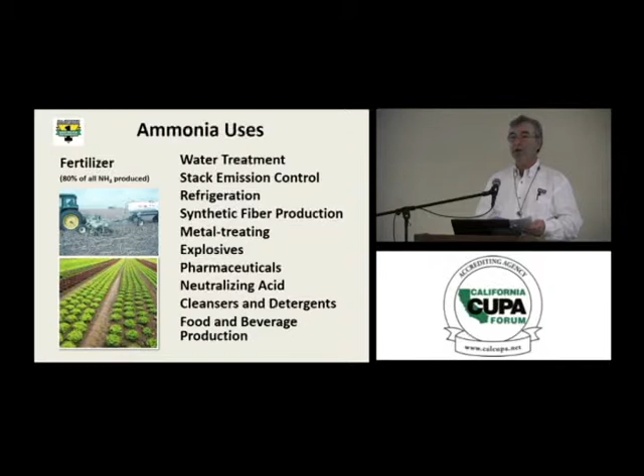The popularity of ammonia is going up. With the Montreal Protocols, Greenpeace actually called it the refrigerant of choice because it's one of the natural refrigerants. And this slide comes from a good friend of mine that just passed away this last year, Anders Lindborg. And I have a few of his slides in here because they're good, and it's a memory for me using his materials, because he was an international soul. He was the prince of ammonia internationally, all over the world. And he promoted the idea of ammonia as a good chemical that could replace chemicals that are not as good. And ammonia is very efficient, it doesn't take as much power to use ammonia as a refrigerant, and plus when it's released to the atmosphere, it breaks into nitrogen and hydrogen. It doesn't have the carbon, and of course that's a big challenge.

So why is it great that ammonia stinks? Right? It stinks. Since you were a kid, you remember your mom mopping the floors with the ammonia? You've been around it. If you ever played football and you got the smelling salts, you've been around it. But why is it good that it stinks? It's a warning sign.

Exactly, it's a warning sign. Most big problems start off small, and most problems can be smelled, especially by the nose that has not been burned out from standing in the odor of ammonia for any time. After you get into it for 5, 10, 15, 20 minutes, the olfactory fatigue comes in. You don't even know it's there as much. You get used to it.

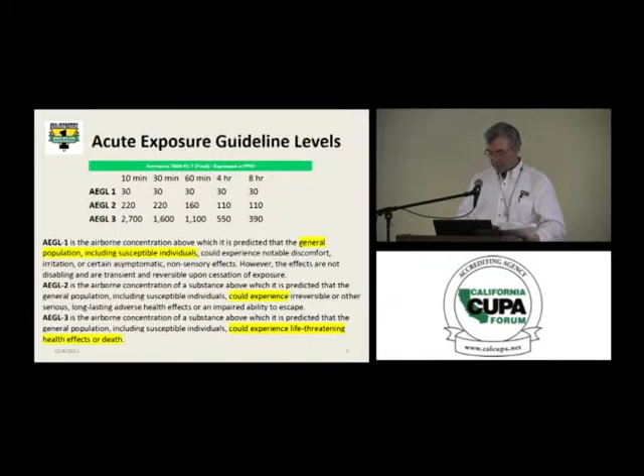We have done the evaluations. I should say the Chemical Safety Board did the evaluations, and they came up with a 5-year review of incidents that happen in refrigeration, because they get a lot of them. It's a high volume rate of calls, but the injury rates and the death rates are actually relatively low. Once they studied them as a group, they found that valves and piping are your number one concerns. And most all valve and piping issues start off with minor releases, minor problems.

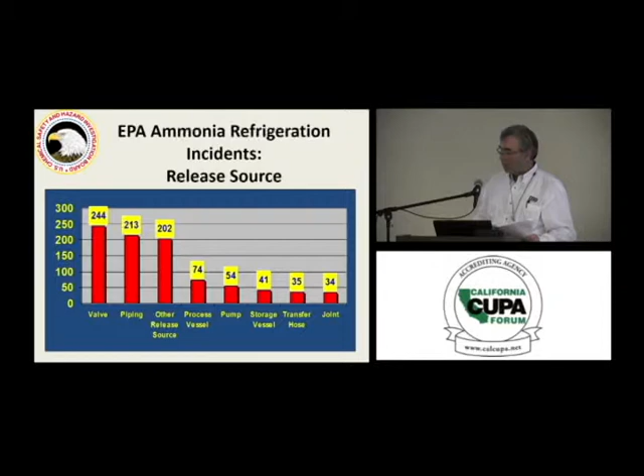And then the employee is caught up in a situation where they may be addressing it the wrong way. This is the operator working on the system, and all of a sudden, there's a crack in a line, they're trying to tighten or loosen or manipulate the system, it opens up right in front of them, and they're hit straight on with an aerosol cloud with no protective equipment on, because they're just simply doing a minor adjustment or they're checking something out.

And so when they can't see and they can't breathe because they've been hit with this aerosol, they go down, and based on their training and background, they may not ever escape any further than that. That's where most of the deaths have occurred with regards to the workers related to ammonia.

The only public death we had was a heart-related problem during an actual escape, and it was the stresses of the emergency event more than the ammonia that caused that. We have 3 zones of concern. It starts with the IDLH in the hot zone, right? 300 parts per million in the hot zone, that's where the risk factor is high. And generally in a system where you have it contained, that's going to be in the room.

Clear the room. Pretty easy to do if you're not the victim right in front of it. Pretty easy to get out of the way of an ammonia release. You go out the door, you close the doors, the release is contained to the room. Now you go to the system, and the system will then control the problem. And then you ventilate the gases. When you ventilate the gases, you have an isolation zone.

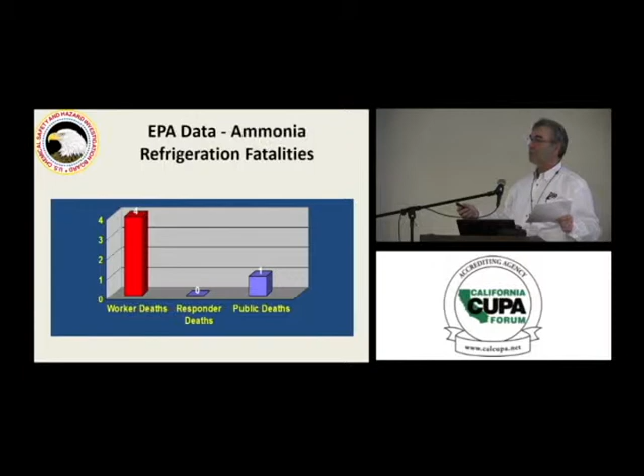So when we learn these facts and we apply it to our plan, and we have the muscle memory to put this in effect, we define our zones, we know what life safety really means. And we use that in our protocols.

Change. So just to give you a little comparison, the death rate looking from 95 to 2004, this was with the Chemical Safety Board, they came up with a total of 22 deaths over all industrial users of ammonia, 11 in refrigeration. So there was a 2.2 per year annual rate in general and 1.1 for ammonia.

Now if you look at carbon monoxide, this was a longer period of time, but we took the annual average, and it was 88 per year. If you take nitrogen, it was 7.3 a year. So you can see that some of the gases that you don't smell, that you don't get warning on, that all of a sudden you fade off into sleep, or you fade off in an inability to breathe, like nitrogen poisoning will do, death comes a little differently. Whereas ammonia is in your face.

I portray it as a hard-working sailor that does a great job, from everything that I described earlier, being a fertilizer to a refrigerant and all the other things in between. But when you let it loose, that sailor is looking to get a drink. What's the drink? He loves water, and he's going after it, and he's going to be fighting mad for it, and he's going to be in your face, and he's going to tell you all about it.

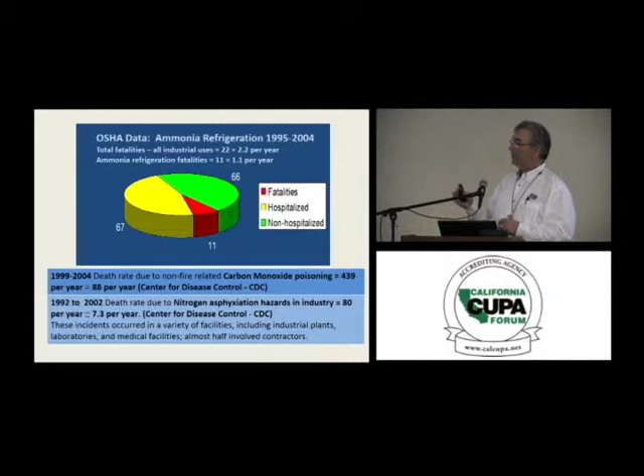And what do you do about it? You close the door, and you send him to the brig. You put him off in his room, and you cool him down. You just cool him down, and he gets easier to manage. The more pressure you take off of him, he settles back down to a nice guy. And when he's a nice guy, you can isolate him and control him. And basically that's the story about ammonia in a general sense, but I'm going to show you the specifics in a minute about how to accomplish that, how to get that to that next phase.

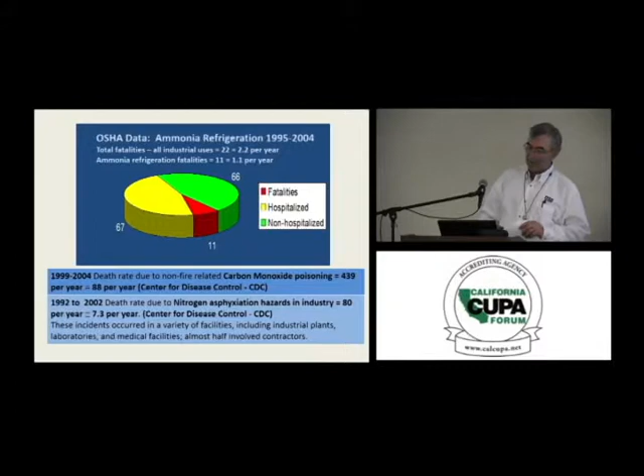Change. Also, there's a high level of injuries that follow along with the same information that I gave you earlier about why we have deaths. There are so many situations where the workers are caught right next to the release, and we haven't got it into culture yet to wear that PPE during the time they're doing maintenance, service, odor investigation, the things where we know these problems occur.

Any old salts from the fire world here would identify with this. I started in 1970 with the city of Davis. The fire chief at the time smoked a cigar. He stood in the doorway and he says, as long as I can stay in the doorway, you don't need that breathing apparatus. Just go ahead and hug the nozzle, and if you got to puke, that's part of life. That's what it's like being a firefighter.

Well, he died with heart disease at about 52, and the United States had the worst record on deaths and losses than any other industrialized country in the world, because we weren't paying attention to the facts. We were being too macho. We had a culture of leather lungs, right? That was supposedly the toughness of being in the profession.

But we changed that with America Burning, a federal act. The federal act came along and they said it's unacceptable to have these levels of losses, and so we had training, we have PPE, we have fire prevention, we have mitigation, sprinklers and smoke detectors. The world came alive with answers. And now we cut the death rate and the injury rate in half, and now we're back where we belong. We're leading the way in reducing life loss and injury, because we engaged the mitigations, we engaged the training and the common sense, and we changed our culture.

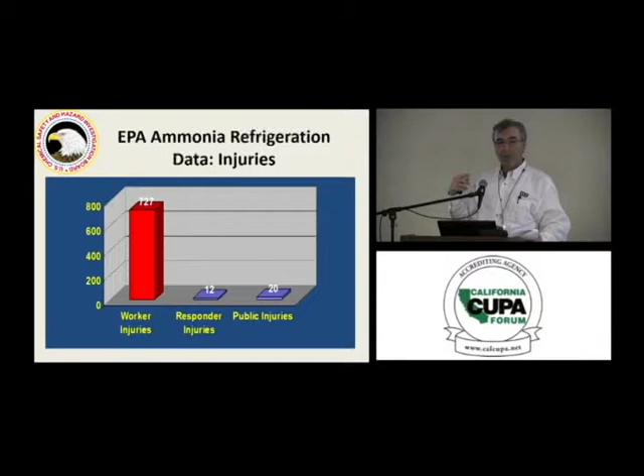Today, if you see a firefighter, even on a dumpster fire or a car fire or an outside fire, without a breathing apparatus on, the shame is going on that person and the discipline as well, because it's not acceptable anymore. That's what we need to get into the industry. All of us need to get behind this and move it and get that culture changed. And then those rates are going to come down significantly.

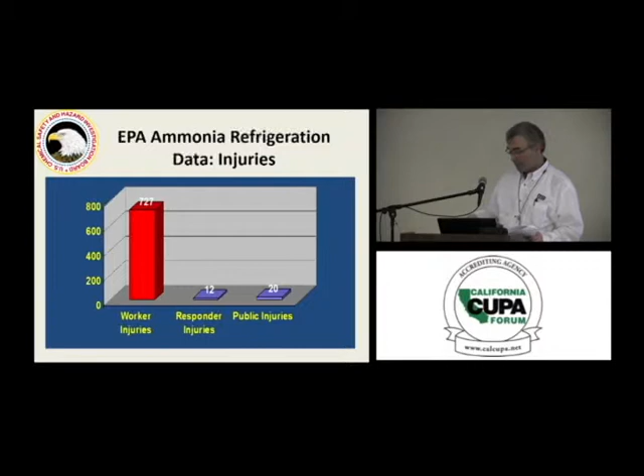Change. It's a cycle of safety. And the better we do this, the better we get at it. The bottom line is prevent them all or stop them small. That's what ASTI was born on with regards to the logic. Prevent them first and foremost. Mitigate them. Listen to the engineers. Work on the answers. Stop them when they're small, even from your standpoint of your response protocols, because that's your best chance. And it happens in the first 30 minutes. Take this golden time and maximize your use.

React quickly, but react smartly and engage. And it comes with engaging the PMP, as you can see over here in the process as we go around. Make sure that you have the right personal protective equipment that goes with an SOP for using it, that we have the layout of how we're going to approach it, and then use your response plan, the one plan logic, to engage and stop the problem when it's small. The better you do this, the stronger the circle of safety is, the less that one's going to get away in that first 30 minutes. You'll stop them small, or they won't even happen at all.

Not a lot of glory in this, like firefighting. The suppression guys, they always used to tell the prevention guys, name one good fire that you put out. Well, of course, it never happened. But they could name a bunch of them that they responded to. Well, that's turning around now with regards to our process. We don't need to go there. And that's where PSM came from, right? If it wasn't for the fact that ammonia has some dangers or risks associated, would PSM even be here? If we were really doing refrigeration and all the processes with water, would we need PSM?

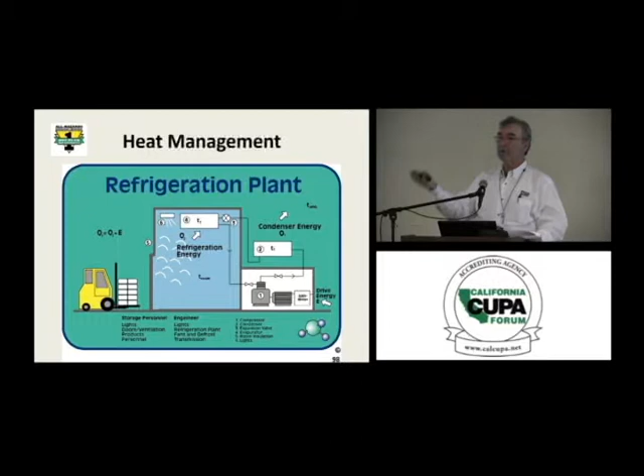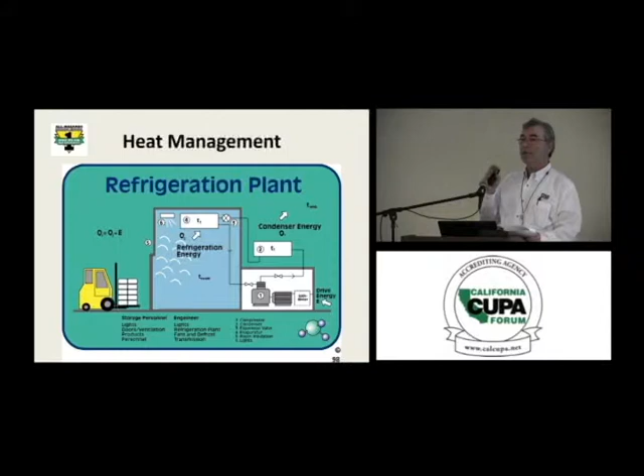So that high pressure vapor that's ammonia, what's it turn into when it cools down? Liquid, right? Now liquid falls back into the receiver and then the cycle starts over again. So it's the switch with evaporation to absorb the heat and the condensation that lets the heat go to the atmosphere. So the heat that came in is the heat that goes out. So in that process, how do we manage it?

Well, just to give you a quick diagram, the process has got a low side, and the low side looks kind of like this in the cold rooms where you've got these evaporators, see the fans up there, and that's where the ammonia is making the transition, and it's absorbing the heat out of the room. And then it goes to the high side, to the engine room. And these are the compressors where it's taking that gas back in and it's going to make it a high pressure gas.

And then it's going to go from the compressors up to the condenser on the roof. And this is where you see the vapor coming out of the top of these, because it's cooling that down. It comes in as a high pressure gas, comes out as a liquid. And then it drops into the receiver. And in the receiver, it's stored there, and eventually with processing, they take the vapor off and they cool it down, and it gets sent back out to the evaporator.

There's a potential stopping point we call the king valve, where the king valve is the liquid shut-off valve from the receiver out to the rest of the system. You shut the king valve off and you stop the flow. Now, many times on the simple version of doing emergency control, it's thought, well, let's shut the king valve off. That solves all the problems. Well, Don jumps up and down as an engineer himself when he hears anybody say that, because it doesn't necessarily stop all the problems. It's just one part of the puzzle.

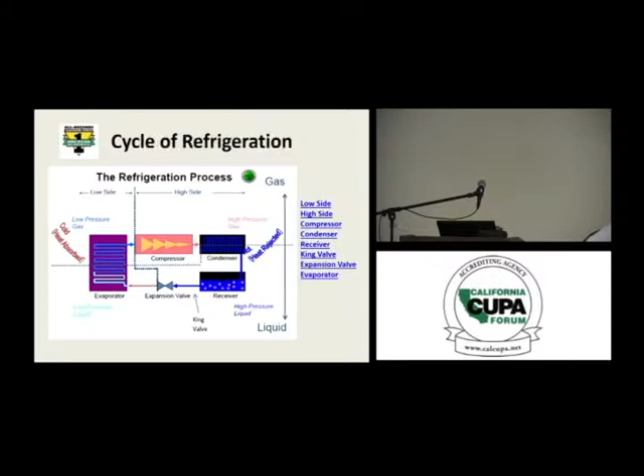Let's say we can set the suction pressure to 0 and bring his temperature down to minus 28 degrees. What's old Sal Ammonia doing then? He's asleep. He's settled down. He's now a liquid, very stable. If I had this cup full of ammonia, and it was minus 28 degrees, would you be smelling it right now? No, it'd look like water.

What if I threw it out on the floor? You'd jump, wouldn't you? Because then it would evaporate, and all of a sudden it's not minus 28 anymore. Now it's absorbing all the heat when I threw it out there, and it flashes off, and it's a cloud, it's a vapor. It fills the room. But as I got it in the vessel, I put him in the brig, and I cooled him down, and I took his pressure off of him. Very manageable.

There's engineers that are telling me today that if we master this process in the emergency shutdown, where we take that vapor pressure down and get it to zero, Don was helping us with this the other day, in 10 minutes we can take a system that's out of control and bring it down into something that's settled down, because we can take that pressure off.

If we could shut off the heat flow that causes it to want to go to that process and just use the compressors only to bring the vapor pressure down, we can do that. That's the goal of operating ourselves in the first 30 minutes out of harm's way.

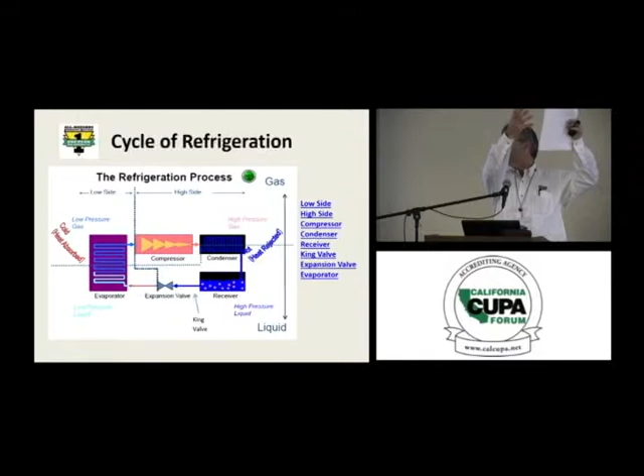And so just to show you on the last leg of the loop, there's an expansion valve that meters the liquid ammonia into the evaporator that's doing all the work that you saw earlier. All that warm air that comes off the product goes to the ceiling, the fans draw it across the coils, the ammonia absorbs the heat, flashes off, evaporates the vapor, goes to the compressor, and the temperature in the room

goes down. Now we stop that heat movement in an emergency action, and now we use the compressors just to settle old Sal ammonia down so he's not a problem. That's one of our strategies. That's one of our options. And that's why when we work with ammonia, we've got to learn how to use the system to get out of harm's way.

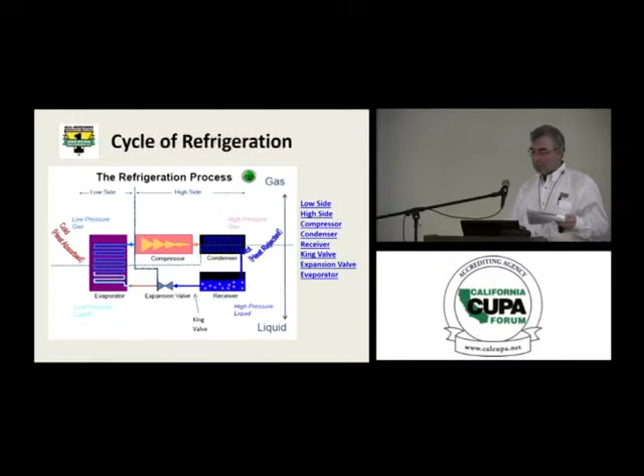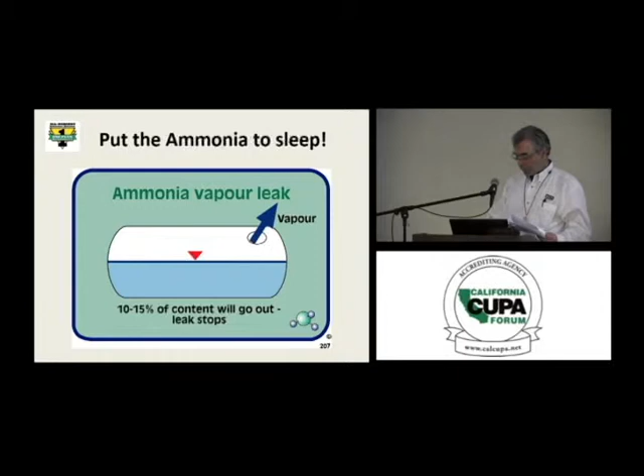So, as I said earlier, you got a leak. This is one of Anders' visuals. You got a vapor leak. If we can bring the pressure down and stop that vapor leak, the problem goes away. And a lot of that is by putting the ammonia to sleep. We also have manual pressure relief devices, diffusers that can do it, equalizers, methods of venting vapor when it gets exceedingly high, like relief valves.

And I'll tell you that the story on these diffusers, though, is nobody ever uses them. They walk away, there's an emergency shutdown button. Sometimes that gets shut off. And sometimes, is that the smartest thing to do? If you've got a situation where you don't have flammability issues and you got your emergency exhaust fans on, even though you have a leak, but you're staying ahead of it, venting the vapor, would you want to necessarily shut everything down? No, we want to take the pressure off.

We want to use the tools. We want the mechanic, the operator that knows what he's doing, to use his emergency action plan to use the system to bring the threat levels down. And we want to diagram that out so that he's ready to do it.

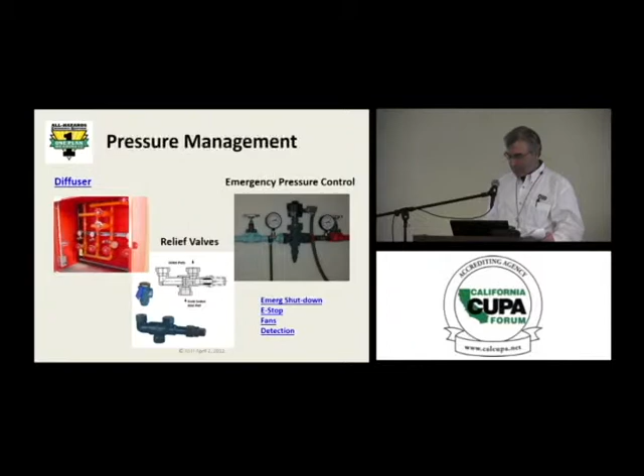The liquid leak, this is the worst. The aerosol that would blow off in a liquid leak and cause an aerosol dense gas cloud, high pressure. This is one of those times where if you have the compressor involved with pumping out a release immediately, off the thermal siphon or a part of the refrigeration system itself, that's when it might be the best thing to shut that particular compressor down.

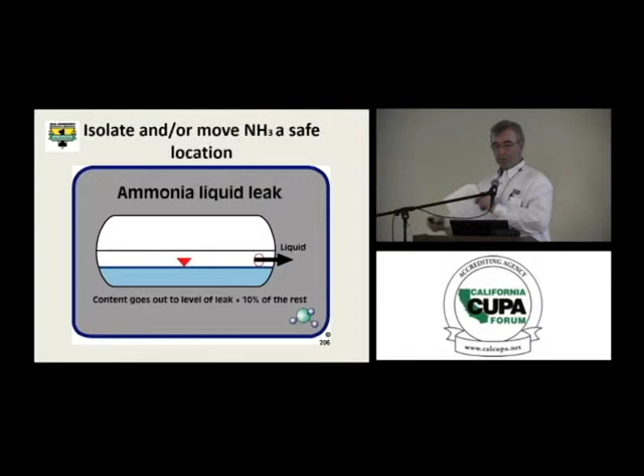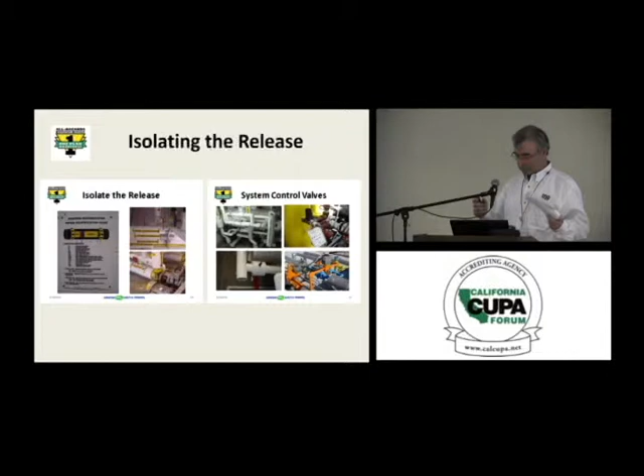But to bring the system down, you might use the other compressors to actually address it, or isolate, move the ammonia to a spot where it's safer, and then bring it down. And that's where we have the isolation valves that can be remotely controlled and automated so that you can move the ammonia around and reduce the impact of the problem.

When we get in situations where we have the releases, many times the releases start off rather small. They could have a gauge leak, for example, that would just start to put out an odor that gets stronger and stronger. And the idea is, can we get in here and actually isolate that leak, contain it to the area, and then fix it?

Well, unfortunately, many times with small releases like this, when the smell of ammonia hits the air, there's a fear factor that comes along with that first whiff of ammonia, and everybody shuts down. They walk away. And many times we can get an operator in on a small release and actually isolate it and fix it. And then I'll show you a little bit about what the releases look like as they materialize.

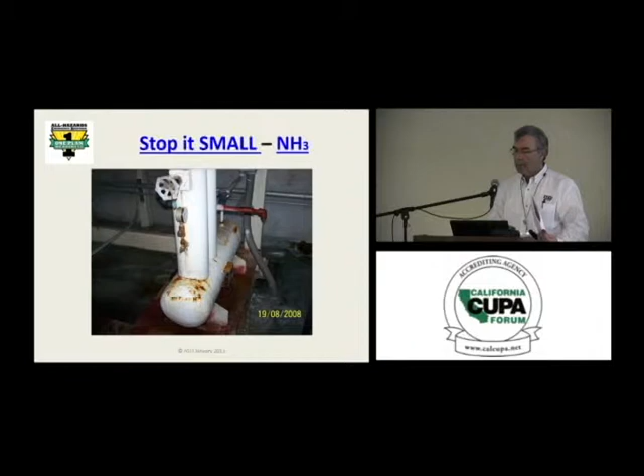Small release. The different phases of the release. You see, this is an aerosol release that we just let loose. And that immediate aerosol, this is a 1/4 inch line, about 80, 90 pounds, Don?

And that aerosol release that really first came out there is going to be a lot of droplets of ammonia. Now, when the droplets of ammonia evaporate into the atmosphere, what happens to the temperature in this area? As it evaporates and takes that heat that's in that area, it's going to get cold. Anybody have an idea how cold it can get in those aerosols? Minus 80. Minus 80 degrees.

You're caught into a big dense gas cloud like that, the freezing factor is significant. And of course, it's 30, 40,000 parts per million, so that's way above our potential to breathe or to survive. The only thing you can do, as just recently happened with an experienced operator: he was shutting a system down, he walked over, and it turned out that pressure had built up on the condenser on a smaller system, a portable system, blew the whole end of the condenser off with 1,000 pounds of pressure, a lot of pressure behind it.

When it blew, it just sent about 200 gallons of ammonia immediately flashed. And a dense gas cloud, he hit the ground, it knocked him over with a concussion of the explosion. He sees it coming, and with split logic, muscle memory from his training, he realized that he had two choices on his escape. Which way would they be? If it's coming over me this way and I'm on my back and I'm rolling over, which way am I going to go to get out of that release?

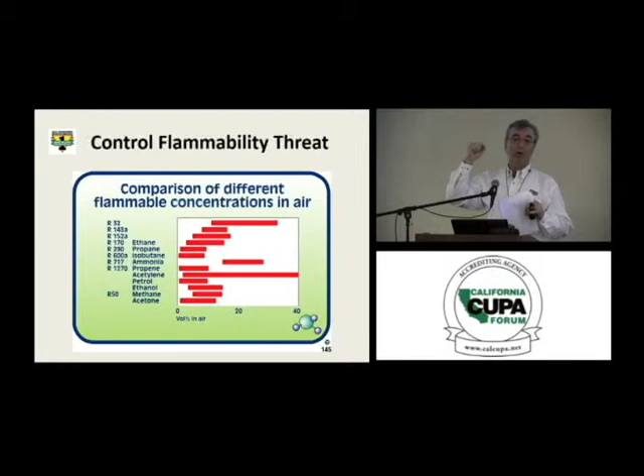And when it ignites, it's just like a flashover in a fire. It's like smoke when it burns. It's got that kind of flash potential. It'll knock you down, it'll flash over, and then it'll be done. It doesn't have the concussion power that propane does. Propane, the curve on that is real high. It hits hard and it's over. Ammonia burns for a little while.

I've been through 4 fires while I was a fire chief in Watsonville with ammonia. And one of the good stories about it is it vents, it goes in the thermal plume, it's never really been a problem. And if you got a good operator, they're going to move that ammonia out of harm's way and put it back in a receiver where it can be safely stowed and isolated from the rest of the release. That's why they got to be part of your team.

This one was a circuit breaker box, a circuit breaker that had been giving that company problems, and guess what they did? They didn't fix it, right? And that's what's happening with a lot of these things, is that you get the warning shots, you get the near misses, you get the situations where there's something wrong, and failure to act at that point materializes where all of a sudden you get an arc flash.

This thing, when we got on the scene, was what the first engine on the scene saw. We had a photographer with them when they pulled their first line. It was white arcing electrical. And then while I was there talking to the command team, asking them, so what are we going to expect with the ammonia, and where's this fire going to go from the engine room, and we're trying to figure out a plan and addressing it, then the main power transformer started blowing and arc flashing. And so the utility company had to shut it down completely before we could even fight it.

We put it out. I recognized that we didn't know what we're doing, and that's when Doug Hill and Don Tragethon and a number of others, we came together and said, hey man, there's no standard out there that we can go to. We've got to start learning more about these processes and engaging.

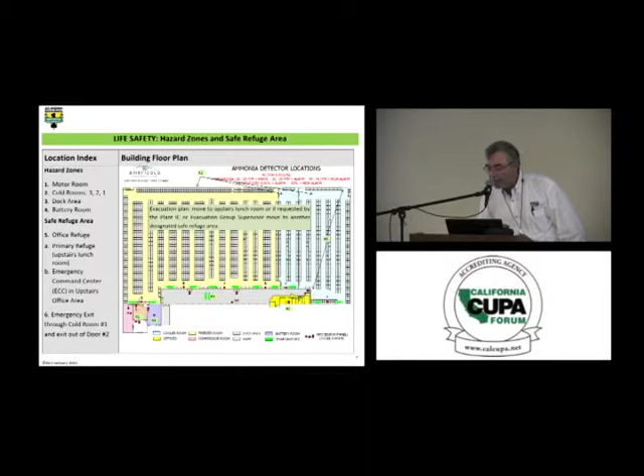And then we go through that process of defining the zones with a floor plan. So in this facility, you can see our motor room is number 1. It's located down over on this side. The loading dock that actually has refrigeration is right here. And then there are cold rooms. There's actually 3 individual rooms that have doorways in between. So we define that, as well as the safe refuge location. It's in that yellow area right here, and an emergency exit out of that. Now you'll see in the diagram below here that we have a picture of what that diagram is all about.

So in our hazard zone checklist, when do you think we make that notification? Level 1, level 2, or level 3? On a small release, a contained but controlled release, or a large release? We decided to go with level 1. We're going to tell them right off the bat, even if we have a small incidental release, so that they can engage their own plan. And we work with them ahead of time on what they would do to actually deal with that.

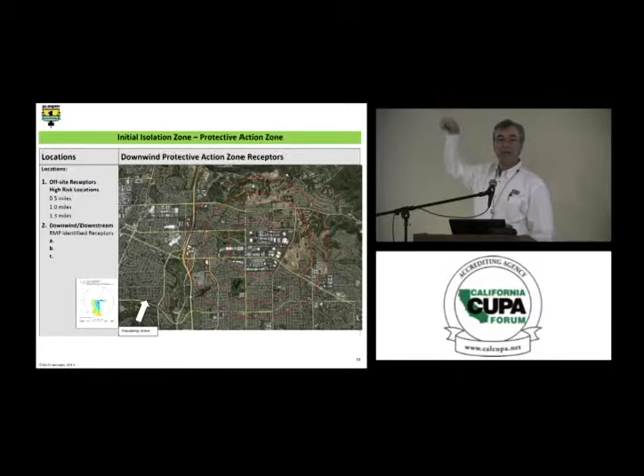So if you're working over in corner CD, you know that that's where the emergency exit is from the safe refuge. It's sitting over on that corner. And firefighters and responders in the facility, you can all talk the same language. You don't have to go, I think it's northeast or southwest or whatever. It's corner CD. We visualize it, we plan it. With Ernest and the team, they're even going to paint it on their walls, side A, side B, just so their team gets used to geographically orienting themselves in a good way.

They have a lot of concern for side B, because side B, that's where the penny saver is, and that's where there's going to be a lot of action. And so we got pictures of it, and we're ready to engage our action plan. Now as we go through this, we have the roles of the players in a checklist format, how they're engaged. I don't really have time right now to go through all that. I do want to take you through the process.

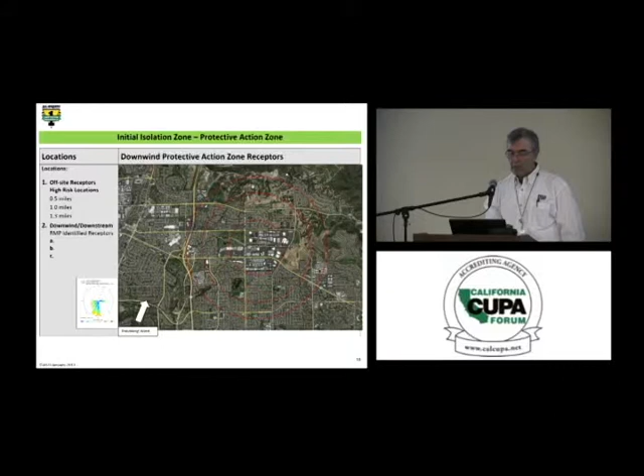We have a, oh, what the heck?

There we go. We have an emergency call-in form and a training that goes with that. We want the who, what, where of what's going on, those details. And then to transfer that who, what, where, and what's going on, what's the life safety threats, immediately to the incident commander. And that who, what, where is triggered to hazard zones. What's going on? What kind of release do we have? So that the nature of the problem, the hazard zone and the level of concern, and the size of the isolation zone can be defined fairly quickly by the incident commander. So when the incident commander takes charge, they announce that right off the bat.

And we have a method for tracking who's available. The plant IC, the lead, responder, notification unit, alert. Who's available, and then scheduled for the emergency for the week, the month, whatever planning period they want to use, so they know they're backed up always by somebody that's there and available to take that position.

The checklist also allows for, in some cases, like the notification unit leader, the planning section chief, they don't even have to be there. When they log the information, the scribe, the person making the calls, records it. It's documented. We need that, and we need to track with it, that documentation throughout this process.

And then when we go through, and actually I want to get down to the hazard zone checklist here. Notification lists. Another element to the process is we have a situation status form that we track. We have off-site, the contractors, the toxicologists, those that can support the response, the phone numbers and information are readily available.